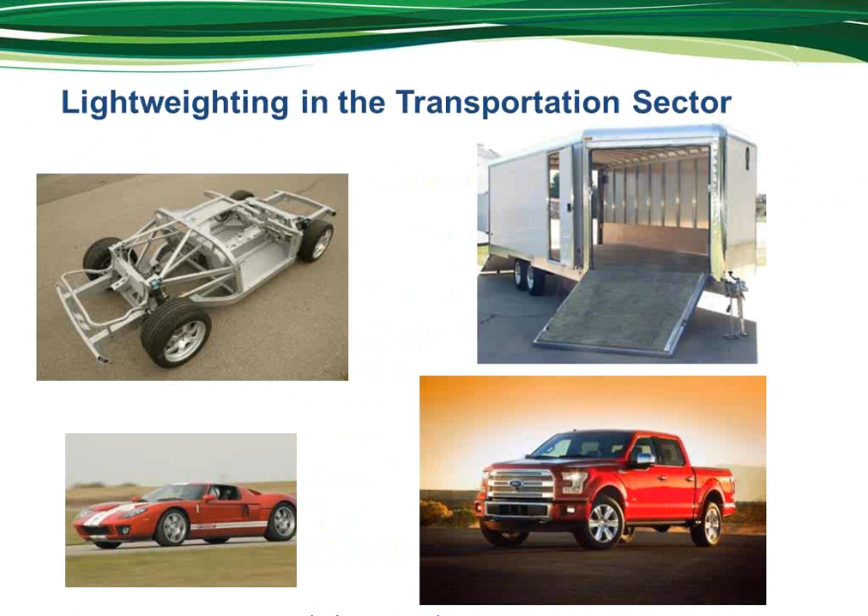Again, a bit on the value of the competition. Aluminum extrusions are part of a growing and in-demand market, in large part because of the sustainability and practicality of designing with extrusions and the features that can be designed into an extrusion, as well as lightweighting and the resulting environmental impacts that brings about. One of the truly growing markets for extrusions is lightweighting within the transportation sector. Not just because of government-imposed CAFE standards for fuel economy improvement, but also because that is where the market is going, where what consumers are looking for. They're looking for more fuel-efficient cars and less of an environmental impact from automobiles and other means of transportation.

And again, aluminum and aluminum extrusions are one of the best ways to lightweight automobiles to further achieve those objectives. Another area where extrusions are establishing themselves is in the field of solar energy. Because of the way extrusions can be designed, because of their lightweight, the features that can be incorporated into them, they make a perfect method of creating the support structures for the solar collectors in the solar fields. Still, one of the largest markets for extrusions remains building and construction. They're used extensively, primarily in commercial construction, for all kinds of things, windows and doors, but also for sunshades and for all kinds of other various features, canopies, and other things incorporated into building and construction applications.

So what is the value of the design competition? Well, it gives us an opportunity to expose students to what extrusions are and understanding more about the extrusion process, and how extrusions can and are being used and how they can potentially be used in the future. And it's an outstanding opportunity for students and teachers to present more of the capabilities of the process and to learn more about a process that many folks don't know much about and haven't been exposed to.

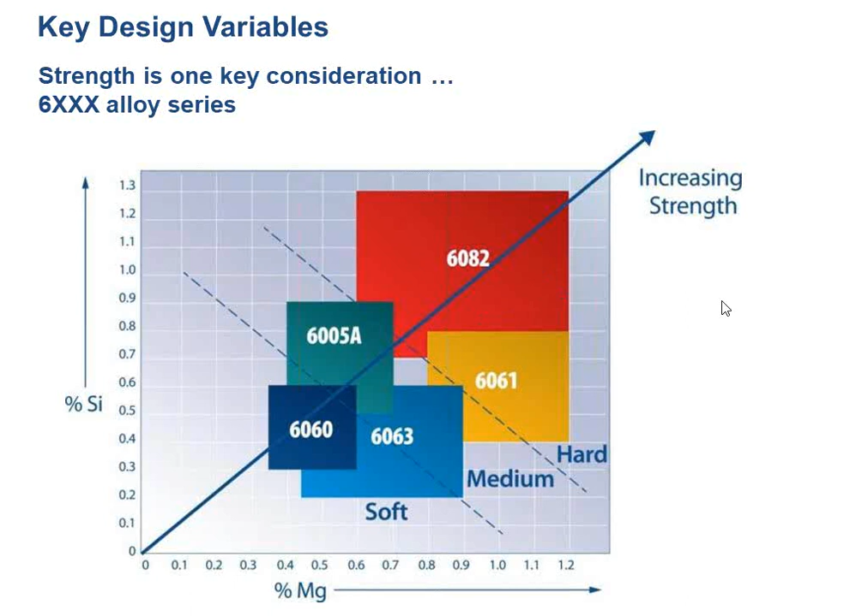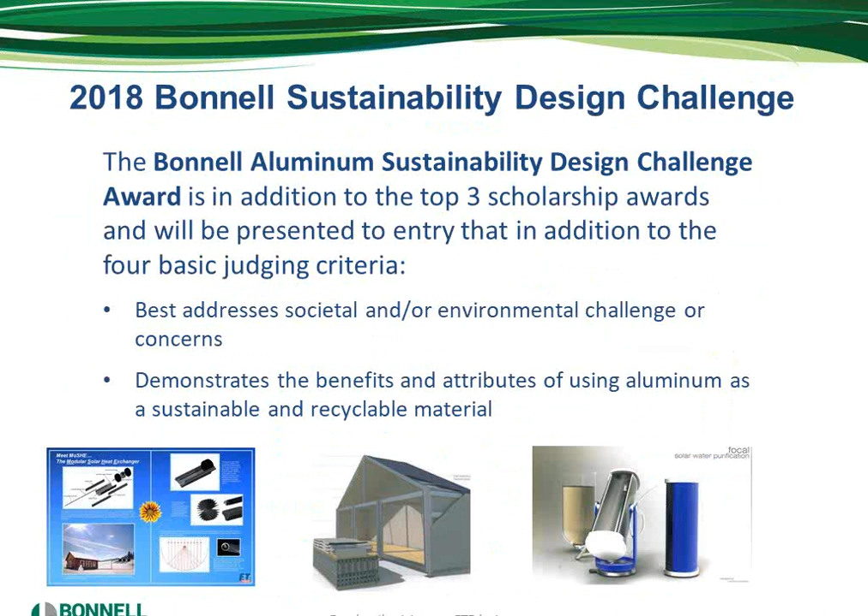So what are the next steps? Well, the next step is to visit the ET Design Foundation website and or the Aluminum Extruders Council website to learn more. And Nancy will now discuss a bit more on next steps.

Nancy, are you there? I'm here, sorry. Thanks, David, and thanks, Craig.

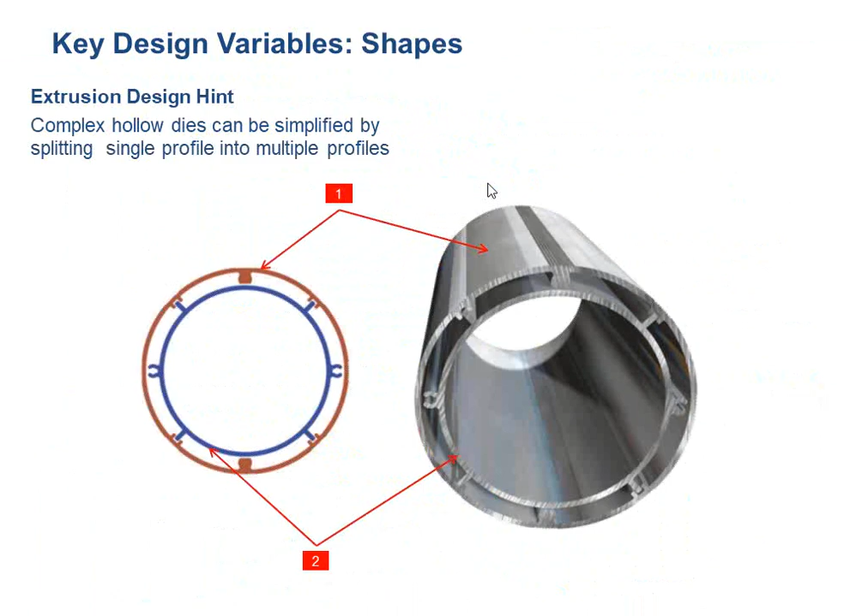Typically, if tongue ratios are 3-to-1 or less, it's very easy—not even really considered a difficult tongue. People can do 4, 5, 6, 8 tongue ratios or much higher, but often to do that, you need to go hotter and slower, and you lose productivity and recovery, and you have issues, perhaps mostly production and cost issues. The costs go up a lot, the tooling is more expensive. So typically, if you can avoid big open areas with little skinny places that are holding the steel tongue back, that's to your benefit in the design world.

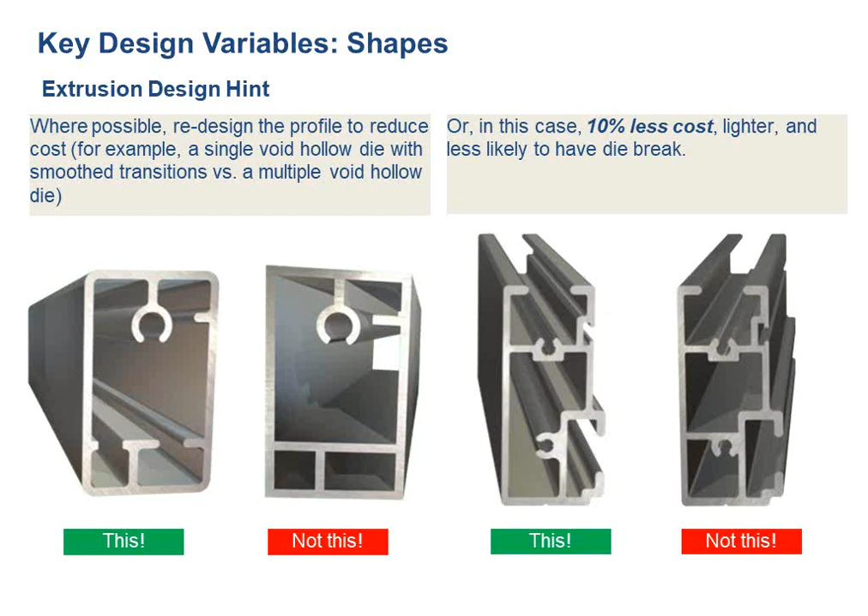Okay, thanks, Craig. And we have one more question. I heard practicality is one of the judging criteria. What are you looking for, and how do you assess practicality?

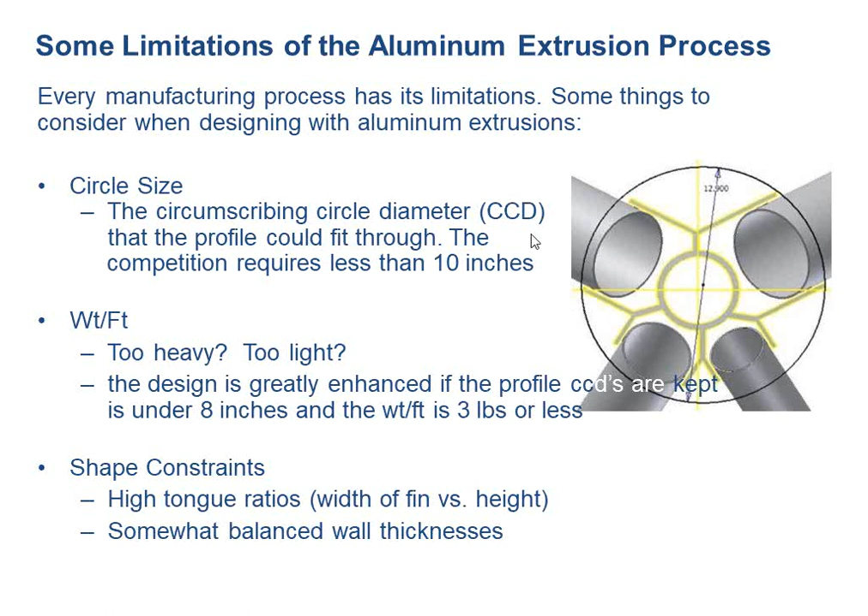Can I start with that one? I think I covered a couple of these things. When we're looking at the overall design, the circle size gives a good hint for practicality. Ten inches or less is all we'll accept for this competition, although you can make parts larger than that. There's not as many extruders that can do this. At 8 inches, there's a lot of extruders, so that's the sweet spot, something with a circle size under 8 inches. You don't want things too heavy or too thin-walled that would be difficult to extrude, or with a bad tongue ratio.

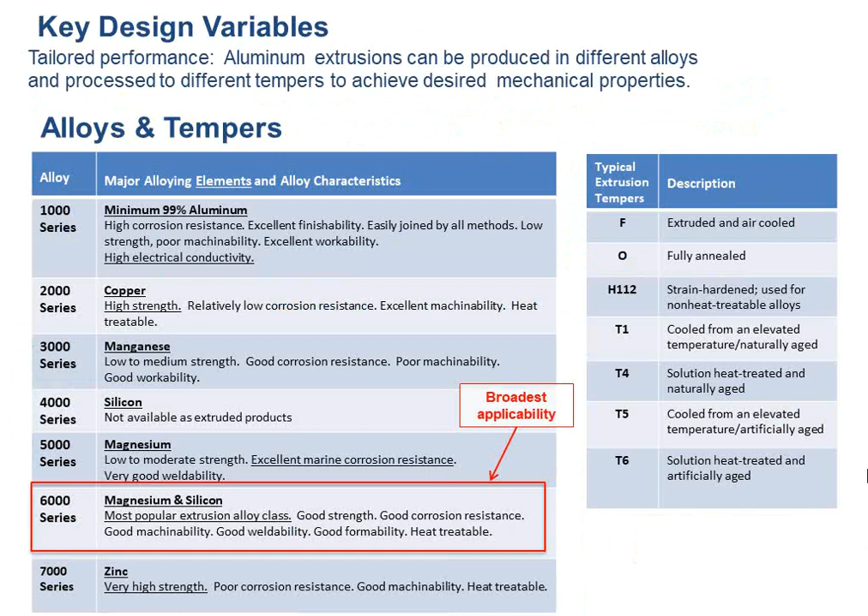Hang on a second, I'm not having any luck clicking. So somebody's moving, thank you. You're taking control away from me when you're doing that. There we go.

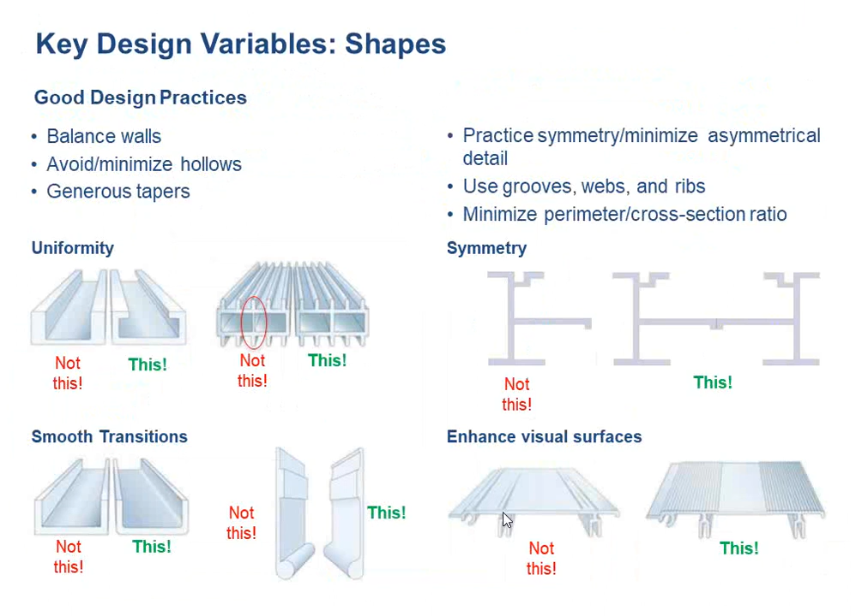Some of the other things would be these hints here. Asymmetrical parts are very easy to produce, but if they can be made a bit more symmetrical, they're better. But often if you need the asymmetry, no problem. So paying attention to some of these design tips will help you come up with the most practical design. But that only deals with production practicality.

David, maybe you want to talk about some other elements of that. Well, yeah, Craig, and I do want to reemphasize one point you made, incorporated in the brochure downloaded for the entry form—the circle size. That's a concept probably a bit new to many folks. But on the brochure downloaded for entry, there's a shaded circle that is that 10-inch circle you mentioned. If the extrusion you design won't fit within that circle when set on its edge, it's not a design that meets the practicality criteria.

But all the design tips we've covered get into practical extrusion design. Extending on that, practicality also reaches into what the product itself is, moving into other criteria such as commercialization. Designing a practical extrusion also has to result in a practical product, one with real market potential—something someone would find usable and useful in their day-to-day life.